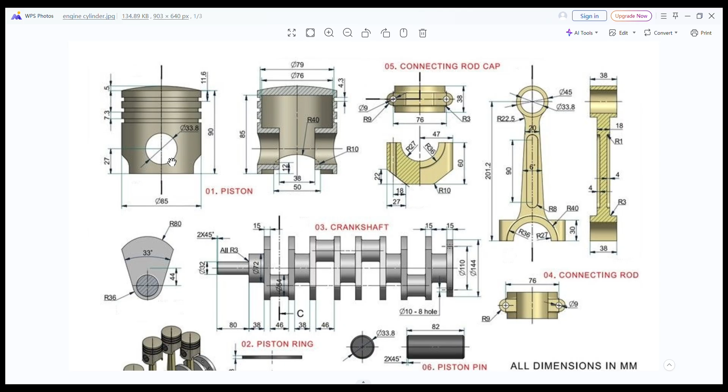Now first we create the front plane for sketch, then create the circle. Dimension is 85 millimeter, and then we can extrude it, and the length of extrusion is 90 millimeter. Enter. OK.

Now look here, now we insert the dome at the top of the piston. Going to insert features, and here is the dome. Apply at this surface, and dome is 5 millimeter length. OK. Now look here, the dome is ready.

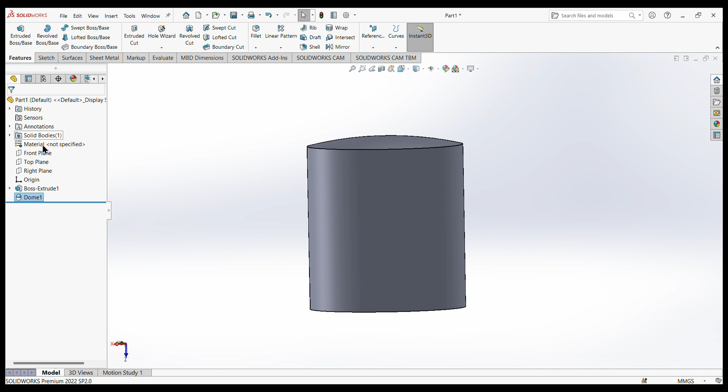Next one, we create the piston rings. First we select the plane for sketch, create the circle of 79 millimeter. If you look here in the diagram, the diameter of the piston ring is 79 millimeter. Now we are going to SolidWorks page, and then take the dimensions 79 millimeter. Enter here. Okay.

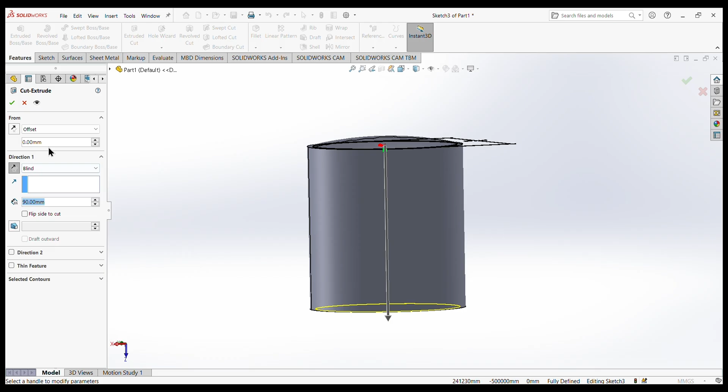Now we are going to create the piston ring. Okay students, so we can go to extrude cut command, select the extrude cut, and reverse direction, apply offset, and offset is 7.3. Enter. Okay, and then the length is 4.3. Enter here. Okay, and here is one thing, flip side to cut means it will extrude cut on the edges, not inside.

Now look here, your piston ring is created. Now you can create 3 more the same way, but if you want to create them quickly, simply assign a linear pattern. But before that you need an axis, so create a temporary axis. Now select this axis, and then apply the pattern, number of 3 patterns, and total length is 7.3 plus 4.3 is 11.6. Enter here. Okay, and select this surface. Okay, now look here.

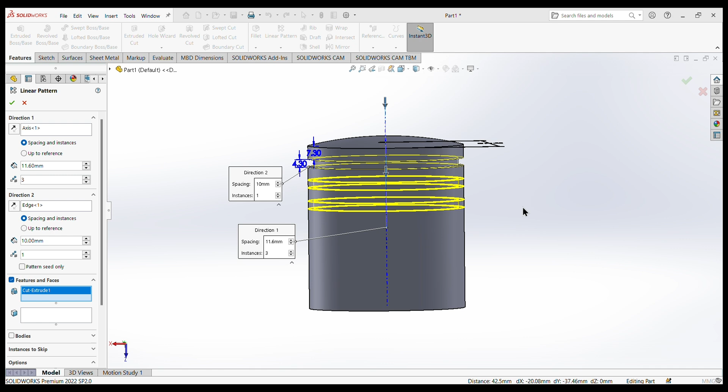Now look here, three piston rings have been created.

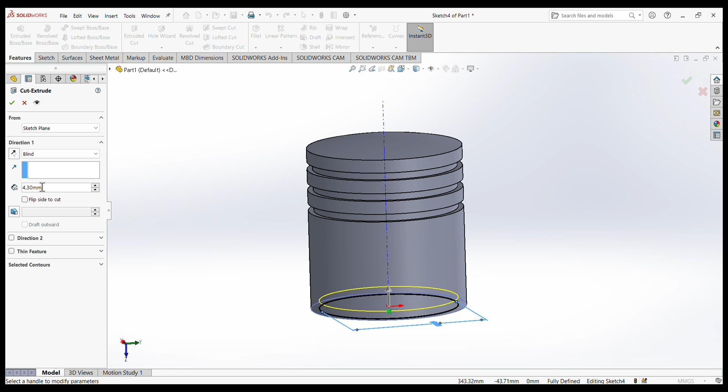Now we are going forward and create the circle on it. First we select plane for sketch. Okay, we create the circle at this point and then assign the dimension.

This one is 33.8, enter. And the distance from this point to this line is 27, enter here.

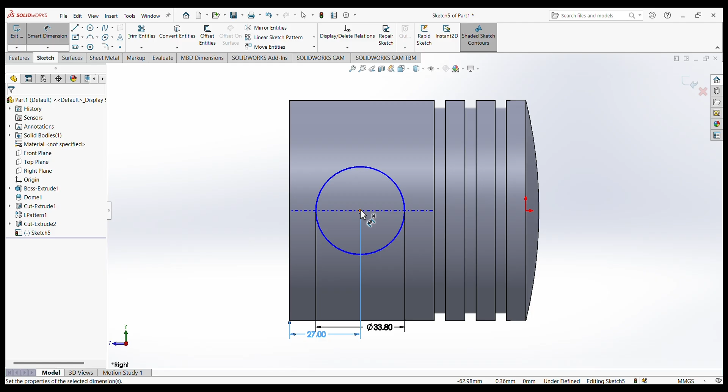Okay, now we make this one. Okay, this is on exact the same axis, this is fully defined.

Now we can make it extrude cut, use the extrude cut command, and then select here, through all both.

Now look here. Okay students, now one thing remains, that is we create a cut at this surface. First we select the top plane for sketch, and create a line.

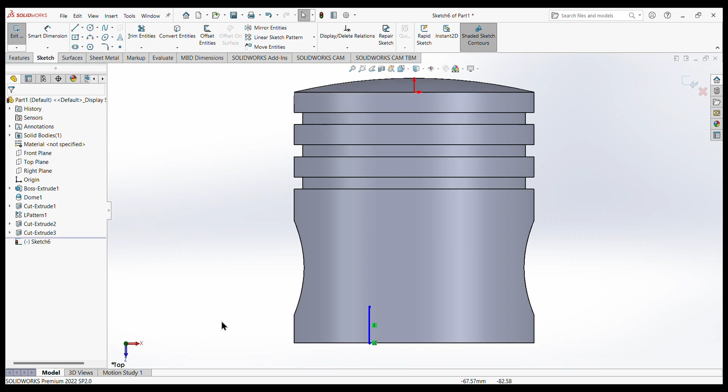Create a line at this point randomly. Okay, and then create a center line at the center.

Now we can assign the dimension. This one is 12 millimeter exact, enter.

And then we make it mirror, use mirror entities, select this one and mirror about this construction line.

Now we apply the dimension again, from this point to this one is 50, enter.

Now we use the 3-point arc, select this point, this one, and now we apply the dimension, the radius is 40.

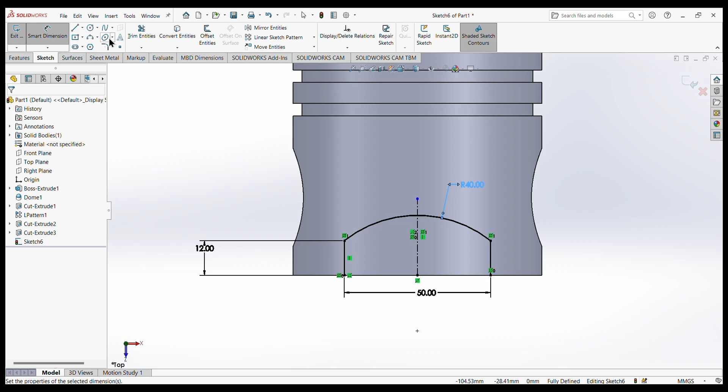Enter. Okay, now we can apply the fillet at this point, select this one, also this one, and the fillet radius, if you look here, is 10. Okay, this is 10 radius.

Okay, now look here, now the one thing remaining is this sketch, make it closed like this one. Okay, now we go to feature, select the extrude cut command and select this face.

Use through all both.

Okay, now look here. Okay students, now the piston is approximately ready. Now one thing remains.

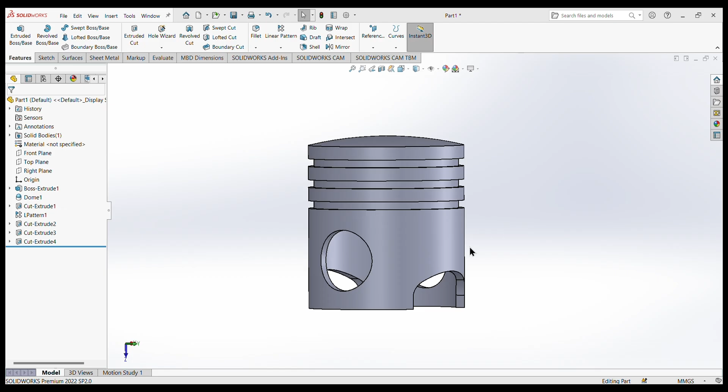We have to select right plane for sketch and make a circle at this point, and the diameter is 45.

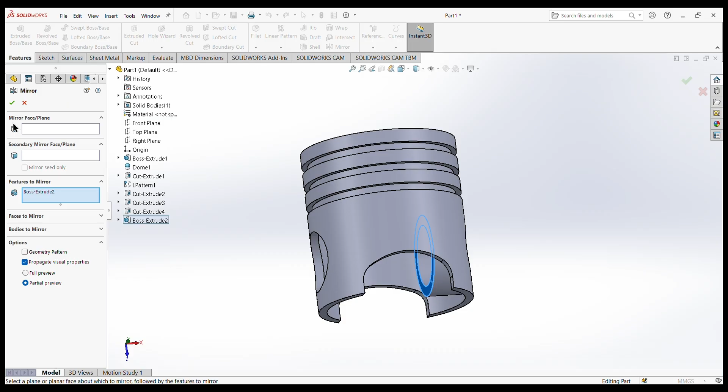Feature to mirror is this one. Okay, and mirror plane is front plane - okay, right plane, sorry. Okay, now look here, our piston is fully ready.

Okay students, so this is our piston that is created, and then we apply the color. Now we are going to detail color, appearances. Here is metal, polished steel. Okay, now look here, it is ready.

Now we can save it, save as, number 1 piston. Okay, save it.

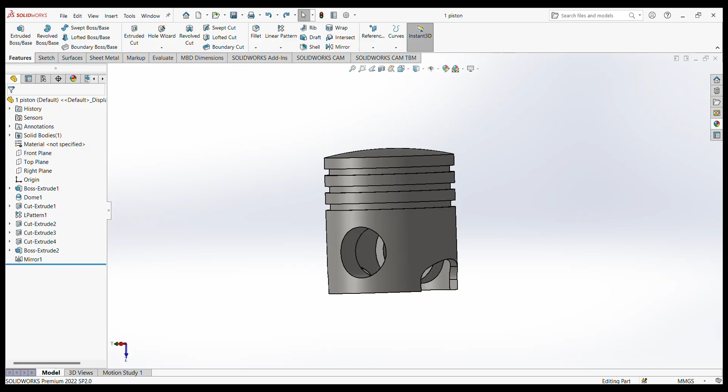Going to SolidWorks page, create new file, new part. Okay, select the front plane, ready for sketch, create the circles.

Make another circle, and then assign the dimension. This one is 79 millimeter, this one is 85 millimeter.

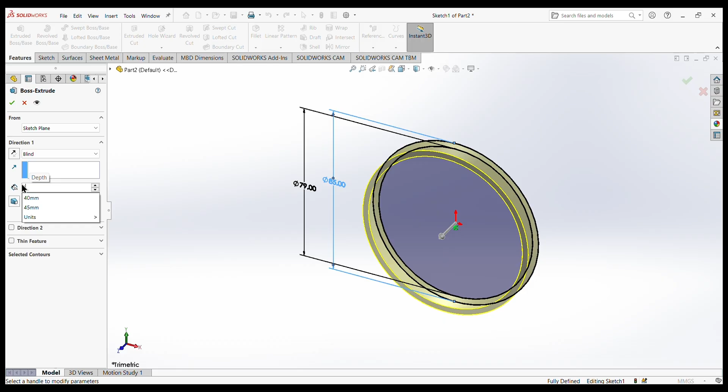Okay, and then apply the extrusion. Total is 4.3, enter. Okay.

Now look here. Okay students, now we apply the color, and here is rubber, this one. Okay, matte rubber.

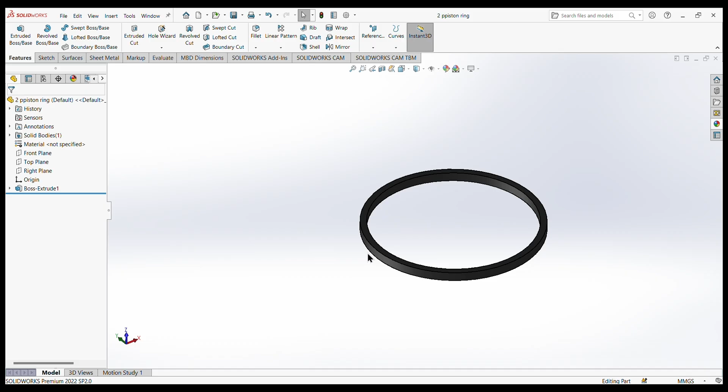So let's go to the SolidWorks page and create this part. Select new part. Select front plane for sketch.

First we create the center lines, vertical, infinite. And create again a center line, horizontal, infinite.

Now create a circle and assign the dimension, 36 millimeter is the radius. Now the diameter is 72. From this point to this one is 45 distance.

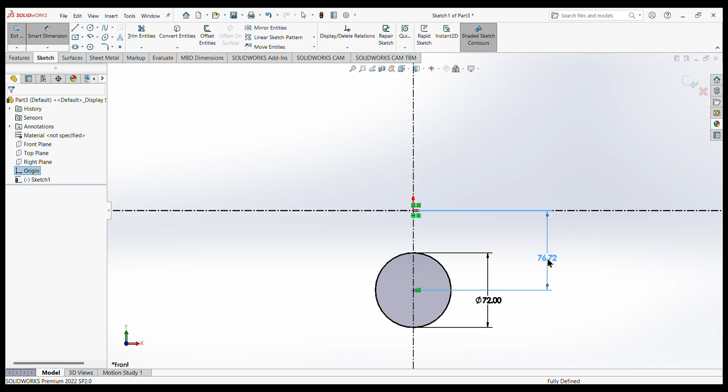Now we create a curve, 3-point curve. Now we assign the dimension. First we make it horizontal, both of these points. Select this one, press Ctrl, select the next, make it horizontal. Now we make a line randomly from this point to this one.

Now we make this line tangent to this circle. First select this circle, press Ctrl key and select this line. Now we create the same line, make it mirror about this one. Trim the extra line, this one and this one, and remove it also. Now we extend it a little bit, just like this one, and then assign the dimension.

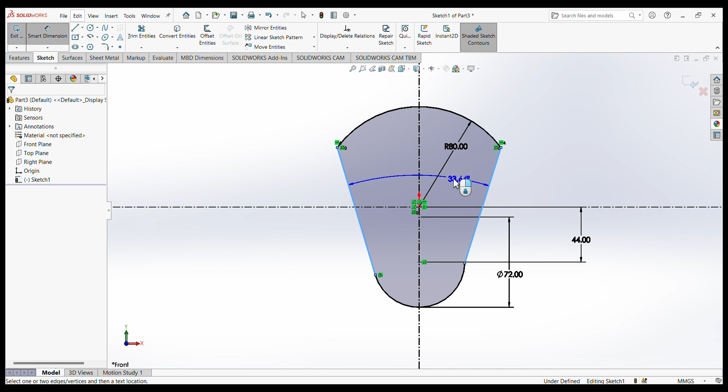This one is 80 radius, and the angle is 33. Now we can make it horizontal, both of these points. Select this one, press Ctrl key, select this one, horizontal. Now our full sketch is fully defined.

Now we can make it extrude. Going to feature extrude, and if you look here, the total extrusion is 15 millimeter.

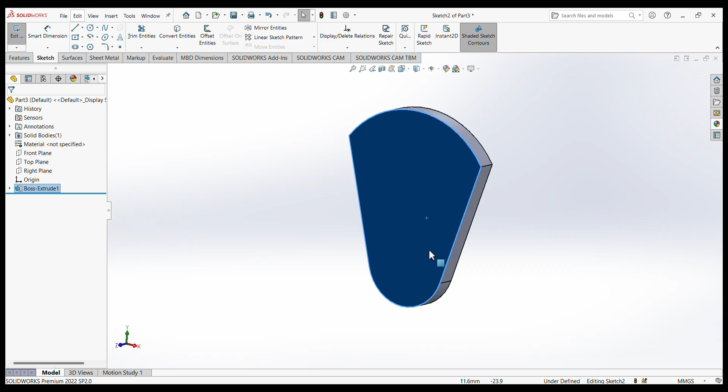Now look here, we select this one for sketch and create a circle at this point, assign the dimension, total diameter is 72. Make it extrude 38 millimeter length.

Now select the other face for sketch, create a circle at this point and assign the diameter, that is 52 millimeter. Now assign the extrude command, extrusion, and 46 is the length.

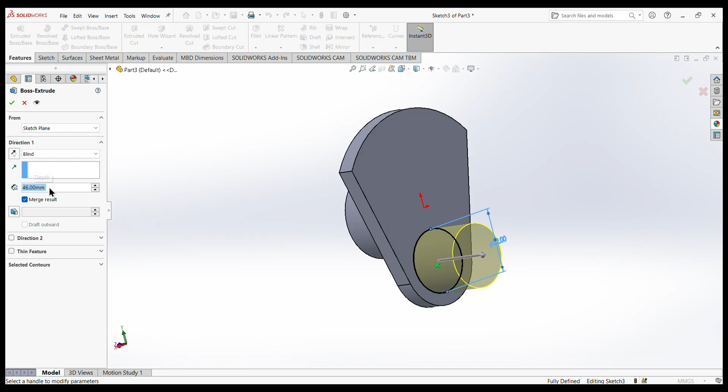OK student, look here. Now we are going to make it mirror. First we select the reference plane at the exact mid between these two surfaces. Now select the mirror command, and the feature mirrors this one and this one.

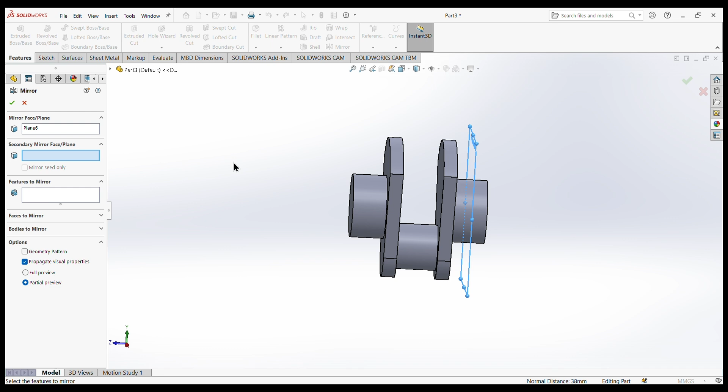Now look here, again select the reference plane between these two faces, and then make it mirror. Select the mirror command and select this plane 6. And here is face to mirror, bodies to mirror.

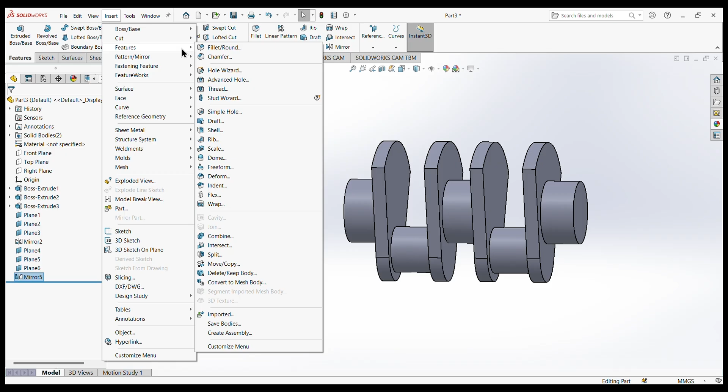Going to insert, here is feature and move copy. Now select this body and assign the degree 180, enter here. Now look here, it is completely rotated 180 degree.

Now again we select the reference plane between these two faces, and mirror, select bodies to mirror this one and this one.

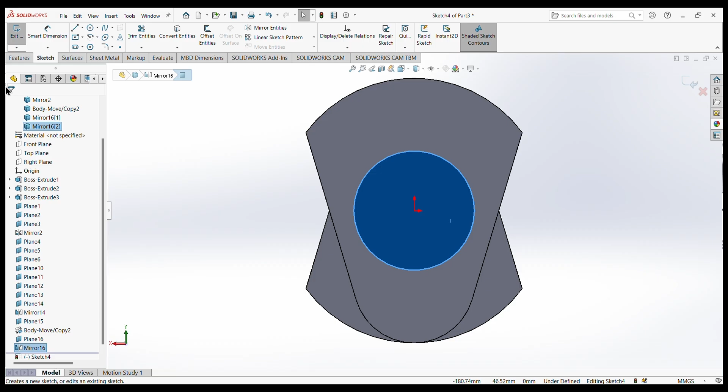Let's go to SolidWorks page. Make this face for sketch, select the circle, make two circles and then assign the dimensions. This is 144, enter. This one is 110.

Okay, now we create a hole of 10 millimeter, assign dimension, 10 millimeter dia. Okay, now we assign the circular pattern, circular sketch pattern, and then select this one at center point, this one, and 8 is the quantity. Okay, now look here.

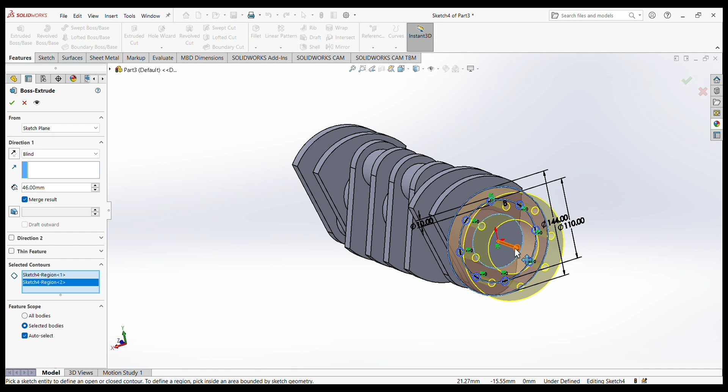Okay, now we are going to extrude command. Now select these surfaces, this one and also this one. Okay, and the total thickness, that is 15 millimeter. Okay, now look here, this end is completely ready.

Now we select this one for sketch, and if you look here, there is 32 millimeter dia and 80 millimeter length. Okay, select the circle command and create a circle, assign the dimension, that is 32, enter, and the extrusion is total 80 millimeter, enter.

Okay, now look here. The one thing is remaining, that is fillet at these ends. If you look here, all fillets at the edges is radius 3 fillet. Okay, and the chamfer end at this point 2 cross 45.

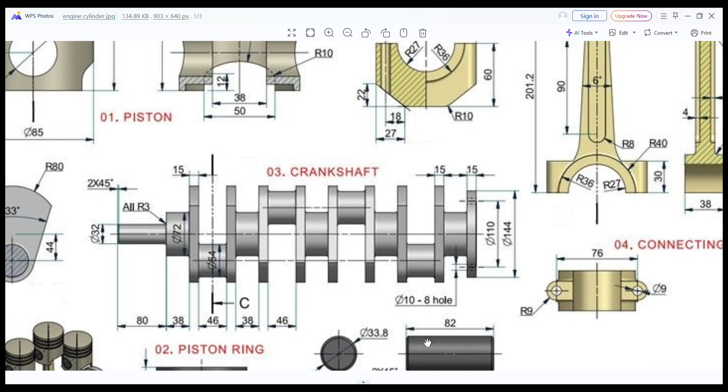Now select first, apply the chamfer at this edge, distance angle, 2 millimeter and 45 angle. Okay, now look here.

Now next we apply the fillet at all the edges. Before the fillet we make it combine. Going to insert, features, here is combine option. Now add, select this one, also this one, and also this one. Okay, add. Okay, now the whole body is combined together, means all is in one body.

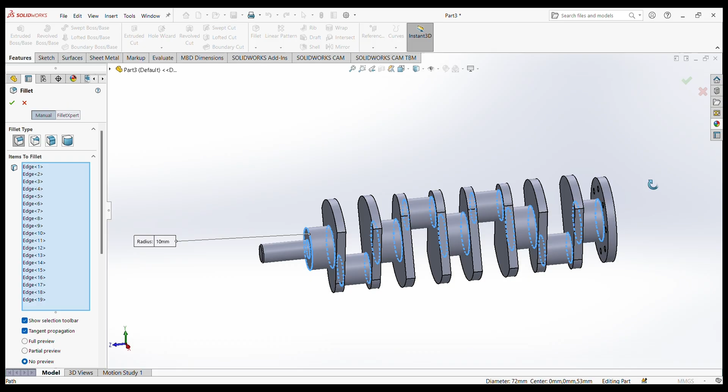Now we are going to fillet command and select the edges, and if we select this one, means select all the edges, no need to select one by one. Okay, now we apply the fillet on it, that is R3, means 3 radius, enter. Okay, now look here, the fillet is applied on all the edges.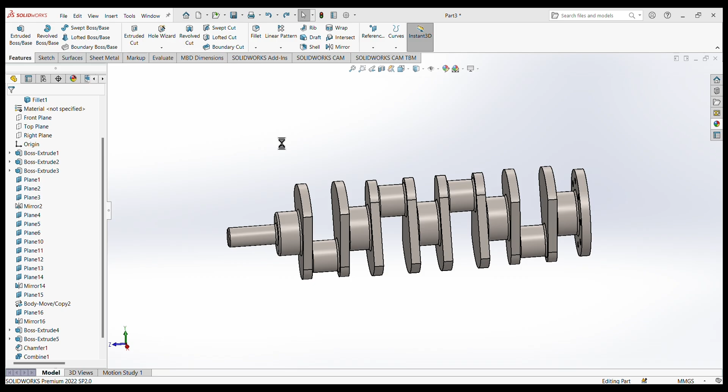Okay students, now we apply the color. Going to appearances, and here we apply the steel, select the brush steel. Okay, now look here, now we can save it, save as, part, that is crankshaft, enter. Okay, now we are going to the next part.

The next part, that is the connecting rod। अगर हम इसकी डायमेंशन देखें तो हमारे पास इसकी जो टोटल लेंथ है वो हमारे पास है 201.2, एंड इसके टू फेसेस हैं, एक टॉप है और एक बॉटम है। अगर हम टॉप वाले को देखें तो हमारे पास 45 मिलीमीटर डाया एंड 33.8 मिलीमीटर डाया है, और इसकी जो एक्सट्रूजन होगी वो हमारे पास 38 मिलीमीटर होगी।

और अगर हम इसके बॉटम एंड को देखें तो हमारे पास ये दो सर्कल क्रिएट हुए हैं, एक 36 रेडियस है और दूसरा 27 रेडियस है। इसको भी हमने एक्सट्रूड करना है और वो भी सेम 38 है।

एंड देयर इज़ द सेंटर पार्ट ऑफ द कनेक्टिंग रोड। अगर हम इसकी डायमेंशन देखें तो हमारे पास टू लाइंस हैं जो कि टेंजेंट हैं इन दोनों सर्कल के साथ, एंड देन इसके दरमियान जो एंगल है वो हमारे पास 6 डिग्री एंड 20 मिलीमीटर इसकी टोटल लेंथ है। और हमारे पास जो इसकी एक्सट्रूजन है वो हमारे पास 18 मिलीमीटर है। एंड देन हमारे पास एक स्लॉट क्रिएट होगी एट द मिड ऑफ दिस वन, और उसकी डायमेंशन है 90 मिलीमीटर एंड रेडियस इज 8।

सो पहले हम ये बेसिक स्ट्रक्चर क्रिएट करते हैं एंड देन हम इसके ऊपर जो अप्लाई होंगे फिलेट्स वगैरह वो अप्लाई कर देंगे। क्रिएट न्यू फाइल, select part. Now select front plane, ready for sketch. First we create a center line, vertical, infinite length.

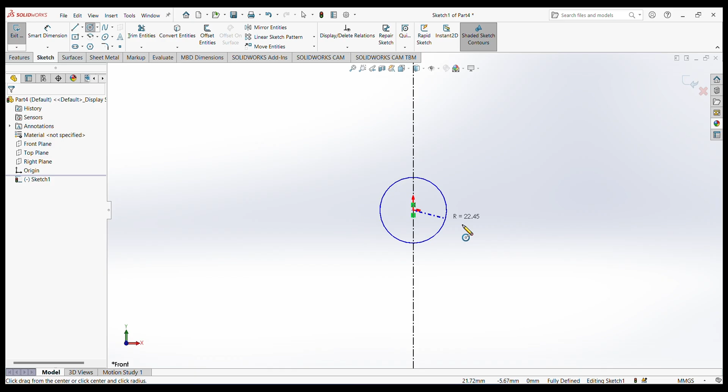Then create the circles. Here is two circles, that is 33.8, enter. This one is 45, enter.

Okay, now we create two more circles at this point and then apply the dimension. This one is R27 and the diameter is 54, and then apply the dimension. This one is radius is 27, diameter is 54, enter. And this one is radius is 36 and diameter is 72, enter.

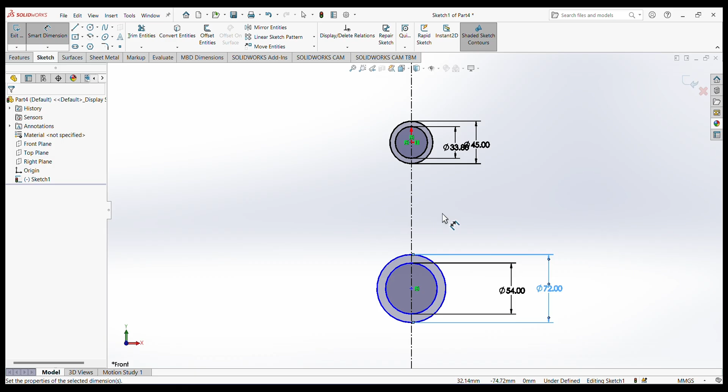Okay, and now the length between them, that is 201.2, enter.

Okay, now we create a line randomly at this point to connect this circle. First we select a line randomly at this point to connect this circle, and then we make it coincident. Select this one, press Control key, select this circle and release the key. Here is coincident.

Okay students, now we create this mirror. Mirror entity, select this one, about mirror, select this one.

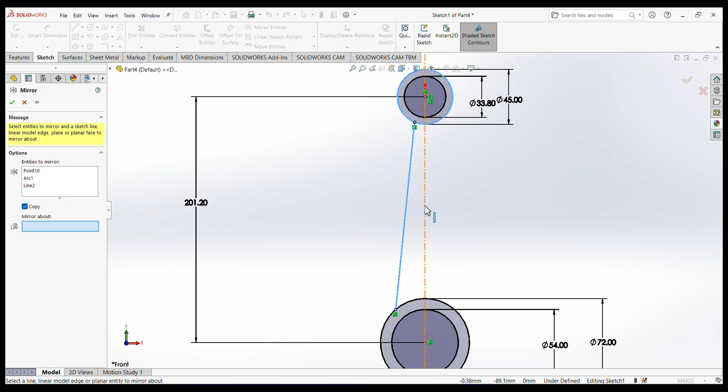Okay students, now the next one, that is we make it half. Select a line from this one to this one. Now use the trim entities. Remove this one, also this one.

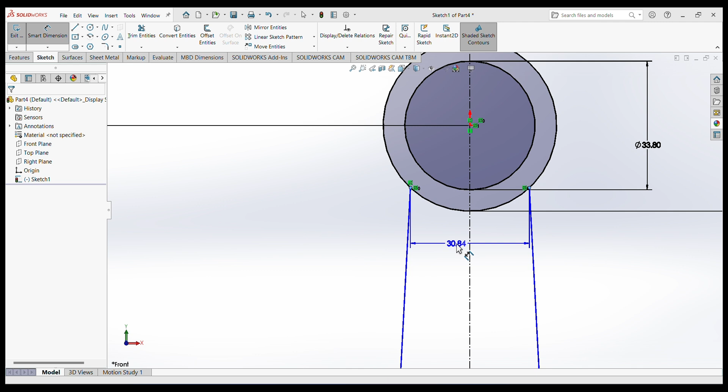Okay, now we apply some more dimensions, just like select the dimension and angle is 6, enter. And this one is from this point to this one, the length is 20.

Now the sketch is fully defined. Now we are going to extrude boss command. Select the extrude boss command and select carefully this one, this surface area. Also select this one and this one. Now use mid plane and the total length is 38. Enter here. Now look at that.

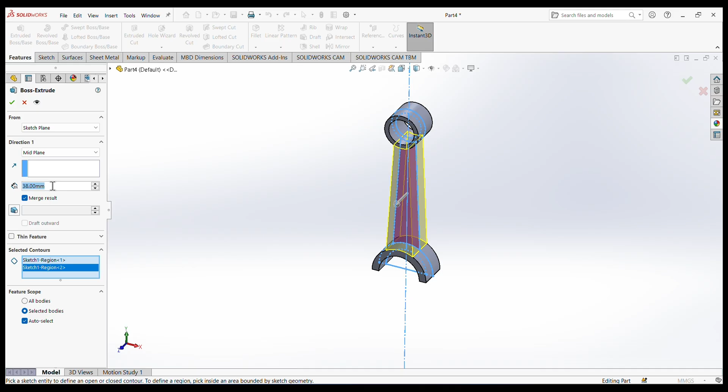Now the next one, we select also sketch and going to extrude boss command. Select this one and this one. Again use mid plane and the length of extrusion is 18. Enter.

Now look here. Okay students, the basic part of the connecting rod is ready. Now we are going further and create a slot on it. Select for sketch and create a center slot.

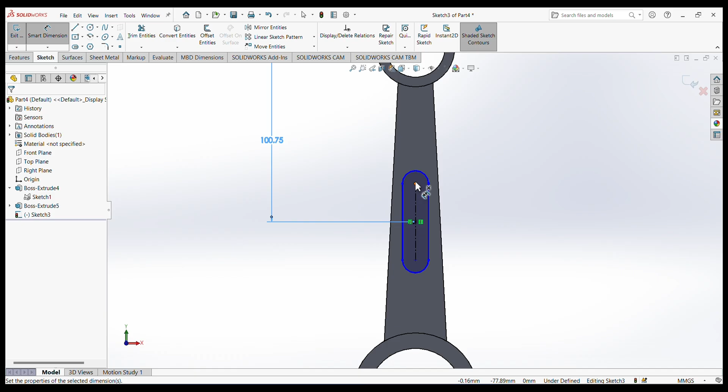Now the slot is fully defined. And now the one thing is that we can make it extrude cut. And how many extrude cut? That is 4 millimeter extrude cut on both sides.

Now select the extrude cut command. Extrude cut, it is selected. There is not mid plane, blind. And the length is 4. Enter.

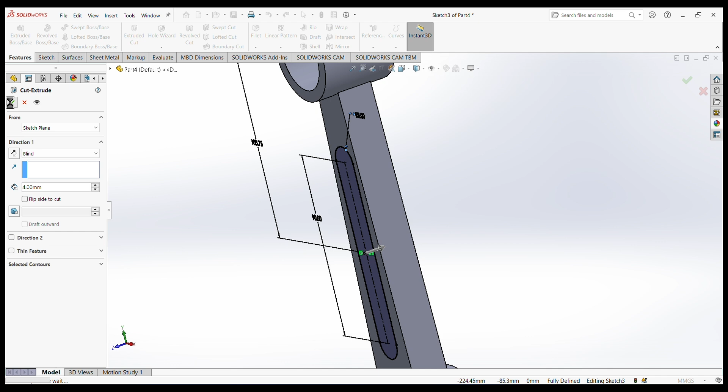Now look here, now we can make it mirror. Select the mirror command and select the plane, front plane, and then feature to mirror, extrude cut. Now look here, the slot has been mirrored.

Here we apply the fillet. Select the fillet command. Select the edge option. Select carefully this edge and this edge. Now apply the fillet, 1 millimeter radius. Now look here, okay students.

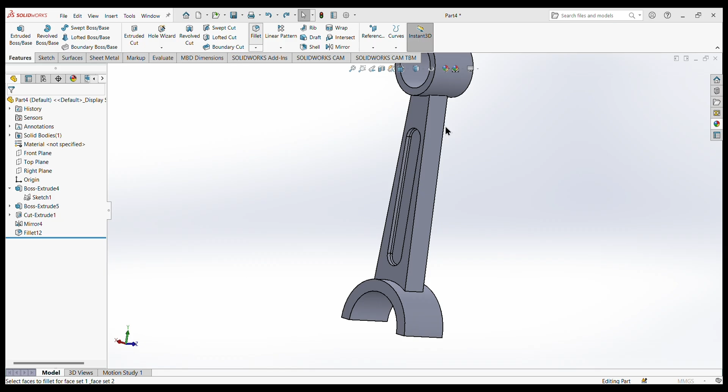Now we are going forward and apply fillet at this edge. Select the fillet command. Select the first option, edge. Select this edge and this edge. Apply the fillet, and that is 40. Enter. Now look here.

Same, we apply the fillet at this one. Select fillet and select edge at this end and this one, and apply the fillet, that is 22.5. Enter. Now look here. Okay students, the fillet has been applied.

Now the one thing is remaining. Select the plane, top plane for sketch. Here create a slot. Select the slot, straight slot.

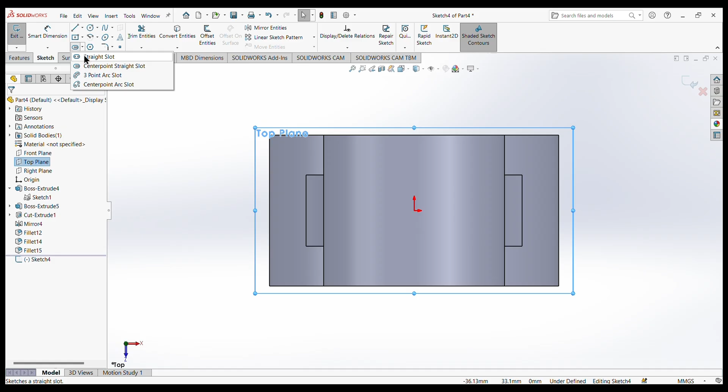Now apply the dimension, that is 76 millimeter. Enter. Now make it in exact origin, make it 0. Enter. Now it is in exact center. Now the radius of this slot is 9.

Now we create a circle at this end and at this end of the slot. Assign the dimension, diameter is 9. Diameter is 9. Enter.

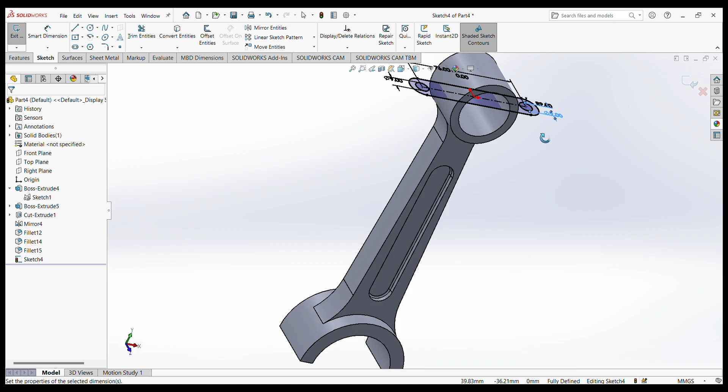Now going to extrude boss command. Here we apply the offset, and that is 201.2 minus 30, and that is 171.2. Enter. And select through all and reverse direction.

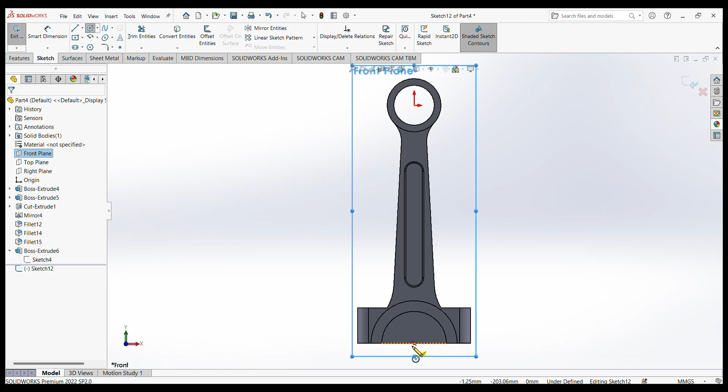Now look here, okay students, now the one thing is going to simply remove this face. Select the front plane for sketch and then create a circle. Assign dimension, that is 54. Enter here.

Now going to feature, select the extrude cut command. Select here, through all both.

Now look here. And there is one more thing, that is, if you look here inside the circle, there is some restriction between the holes. So we create the hole. First we select this one for sketch and then create hole. Here, select. Going to feature, extrude cut command.

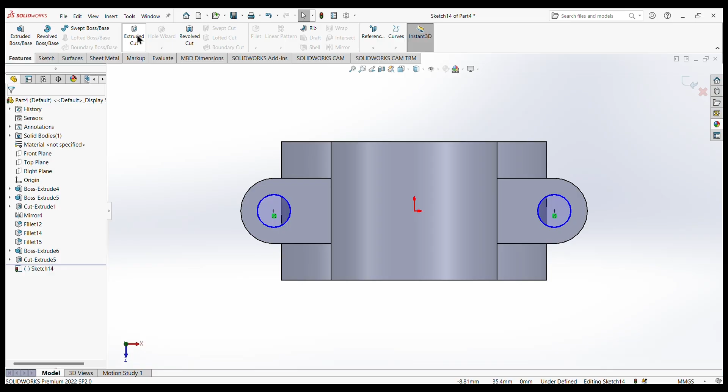Now look here. Now look at that. Here the one thing is remaining, that is applying fillet at this edge. Select the fillet command, select this edge and this edge. Applying the fillet, 3 radius.

Now look here. Okay, now we are going to apply the color gold.

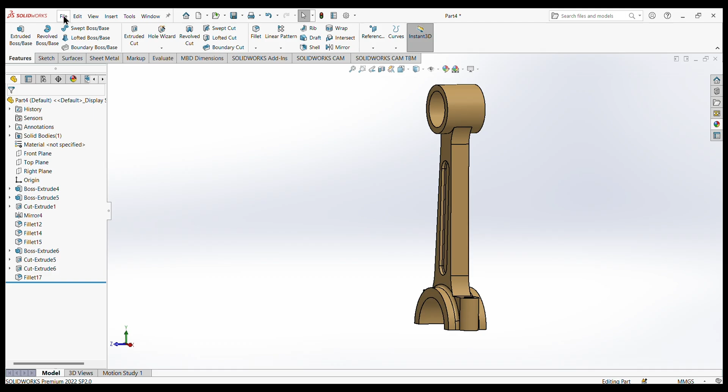Now we are going to the next part. The next part, that is connecting rod cap.

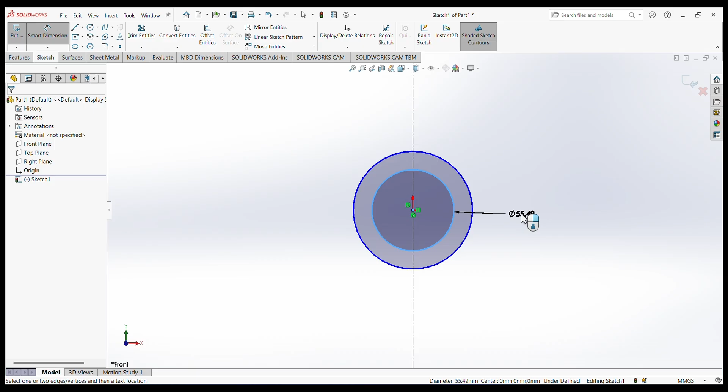This one is 54 millimeter dia, this one is 72 millimeter dia.

Here we create a line from this point to this one randomly, this one just like this one, and this one. Now we assign the dimension.

From this point to this one is 60, enter. Now from this point to this one is 47, same this one to this one is 47.

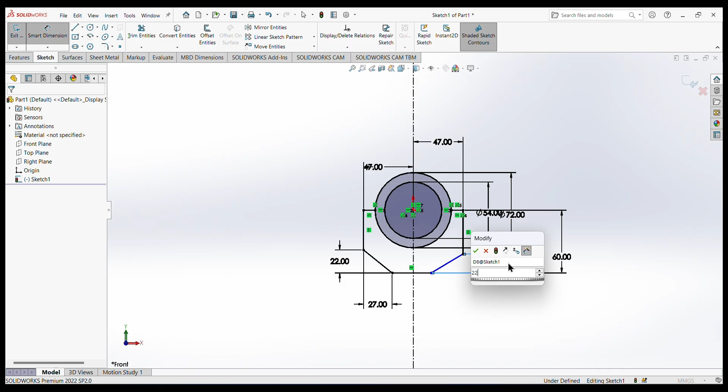And from this one to this point is 22, enter. And from this point to this point is 27, enter here. Same, from this point to this one is 22. And from this point to this point is 27, enter.

Now the sketch is fully defined. Then we apply the extrusion, going to feature extrude boss command. Before extrusion, one thing is remaining.

That is we make cut just like this one. Select and remove this half of the sketch.

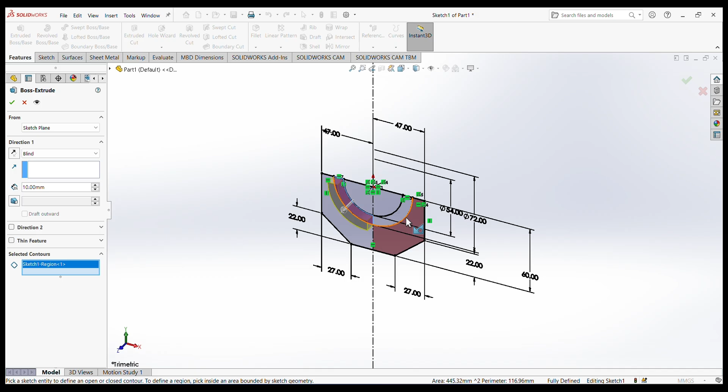Now we are going to feature, going to extrude boss command and select this one, mid plane, and the total extrusion, that is 38, enter here.

Now we are going forward. Select this sketch, again extrude boss, select this one and this one, mid plane again, and the length is 18, enter.

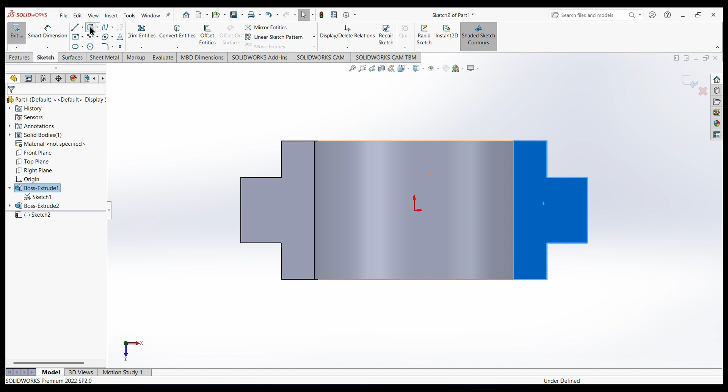Now look here. Now we are going forward and create the holes at this point. Now select for sketch, select the circle just like this one.

Now assign the dimension. This one is 9 millimeter dia, this one is 9, enter. And the distance between these circles are 76, enter.

And make it in exact center, means from this point to this one is half of 76, and that is 38, enter here. Now it is in exact center.

Now we can use the extrude cut command. Select the blind and through all.

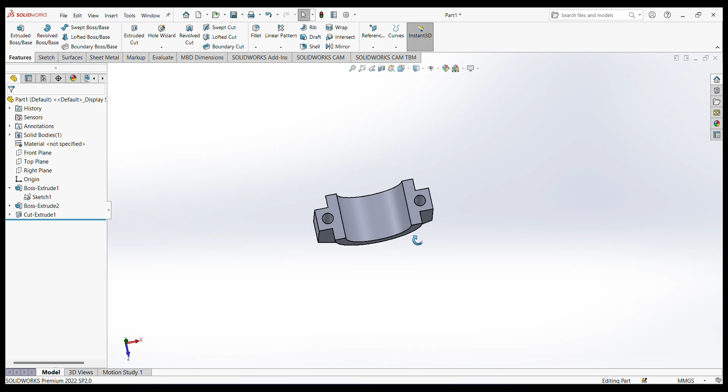Now look here. Now one thing is remaining, that is first we make it sketch. Create the circle again, and here is also again, and assign the dimension, that is 18 millimeter dia. This one is also 18 millimeter dia.

Now we can use extrude cut command and selected contours. Select this face. First we remove it. Now we make it close and then we can extrude cut.

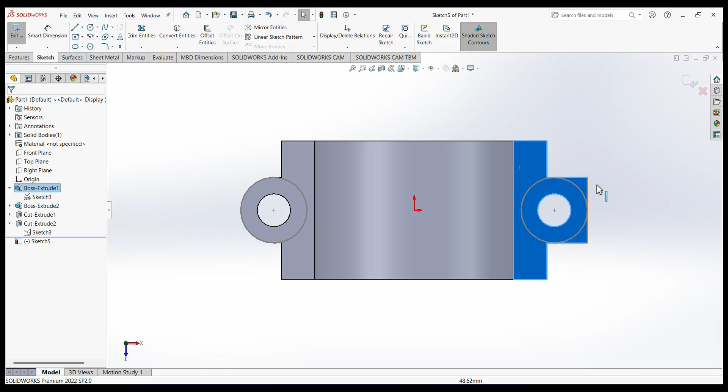First select the sketch and create a line at this point to this one and this one.

Again a circle and then assign the dimension, that is 18 millimeter dia. Enter here. Going to sketch, feature, extrude cut command.

Select this face and this face.

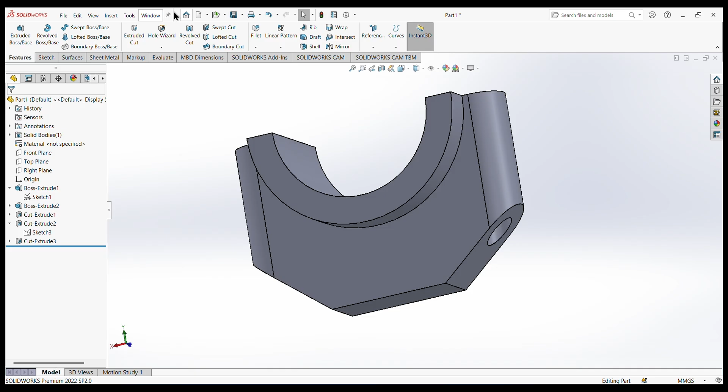Apply fillet, select this edge carefully and also this one. Apply fillet 3 millimeter, enter here. Now look here. The connecting rod cap is fully ready.

Now simply we are going to assign the color. Appearances gold, similar as we assign the connecting rod.

Now look here, we are going to save it. Save as 5 rod cap, enter here. Now we are going to the next part and that is

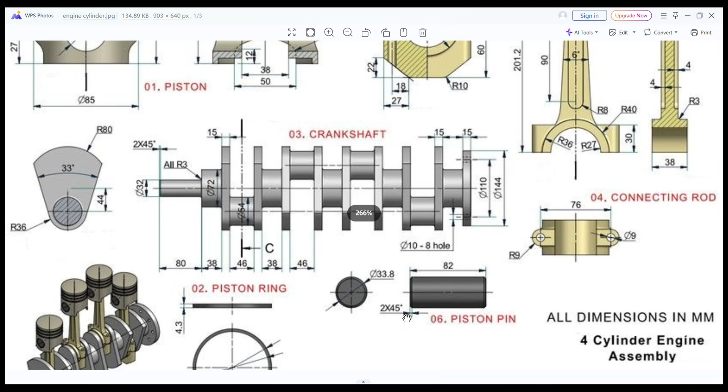Piston pin. Here is 82 millimeter length, 33.8 millimeter dia and at the edges 2 cross 45 chamfer. Select new file.

Select front plane for sketch, create a circle, assign the dimension 33.8, enter here. Feature extrude boss 82, enter here.

Okay, select the chamfer, select both edges and apply the chamfer, that is 2 and 45 millimeter, sorry 45 is the angle. Okay, now look here. Okay students, all the part has been ready.

Now we assign the color chrome. Now look here. Okay, we can save it. Save as 6 pin, enter here. All the parts has been created.

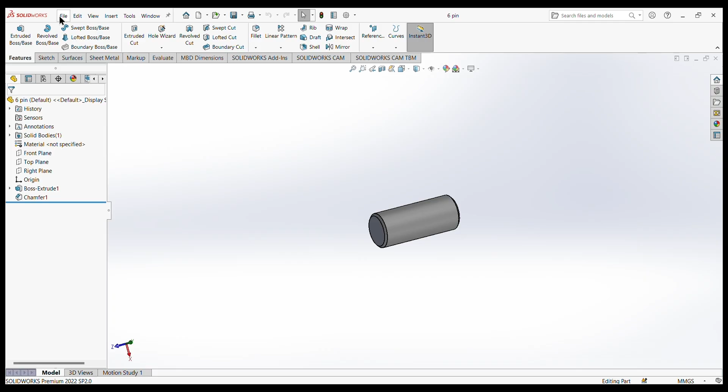अब हम चलते हैं असेंबली में और वन बाय वन हम पार्ट्स को असेंबल करते हैं। असेंबली, ओके।

नाउ स्टूडेंट्स, अब हम वन बाय वन पार्ट को इंसर्ट करते हैं। फर्स्ट वन पिस्टन, सेकंड वन पिस्टन रिंग, थर्ड वन क्रैंक शाफ्ट, फोर्थ वन कनेक्टिंग रॉड, फिफ्थ वन रॉड कैप, और सिक्स्थ वन पिन। तो सबसे पहले हम क्रैंक शाफ्ट को प्लेस करेंगे क्योंकि क्रैंक शाफ्ट के ऊपर ही पिस्टन और कनेक्टिंग रॉड ने प्लेस होना है। तो पहले जो होगी वो क्रैंक शाफ्ट की प्लेसमेंट होगी।

ओपन। नाउ लुक हियर। अच्छा स्टूडेंट्स, अब जो मेन चीज़ है कि हमने इस क्रैंक शाफ्ट को एडजस्ट कैसे करना है, तो वो आपने देखना है। सबसे पहले हम इस पे राइट क्लिक करेंगे।

इसको फ्लोट करेंगे, मीन ये मूवेबल हो। सेकंड वन, अब हमारा जो पिस्टन है उसने इस क्रैंक शाफ्ट के ऊपर प्लेस होना है और देन क्रैंक शाफ्ट ने मूव करना है। अब इसने मूव किस तरह करना है, ज़ाहिर सी बात है इसको कोई पाथ गिवन हो, कोई इसका फ्रेम हो जिसके ऊपर इसने रोटेट करना है। तो फर्स्ट हम एक फ्रेम इसका क्रिएट करेंगे जिसको हम इसके ऊपर प्लेस करेंगे और देन ये मूवेबल होगा।

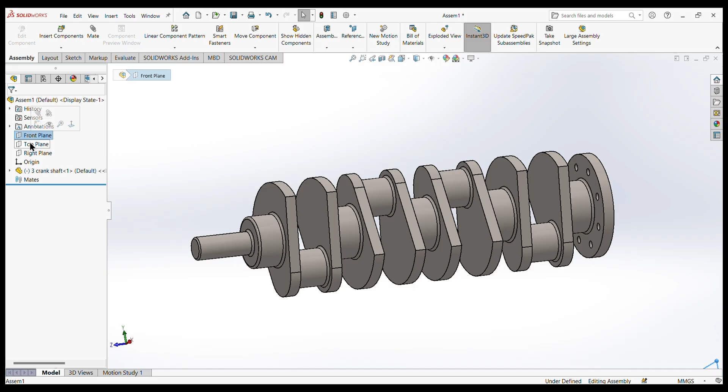तो अभी आप देखें, हम एक इसका फ्रेम स्केच करते हैं। फ्रंट प्लेन, राइट प्लेन फॉर स्केच। Okay, now we create a frame of crankshaft. Okay, create a line.

जितने पिस्टन कनेक्टिंग रॉड हैं उतनी ही हमारे पास ये लाइनें भी क्रिएट होंगी। आप यूँ समझ लें कि ये एक किस्म की पिस्टन कनेक्टिंग रॉड ही है, बस हमने इसको कनेक्टिंग रॉड के साथ कॉन्सेंट्रिक करना है। नाउ वी असाइन द डायमेंशन।

दिस वन इज 156। Okay, this one to this one is 114. ये आप देख सकते हैं इनकी डायमेंशंस उधर ओरिजिनल जो डायग्राम है उस पर मौजूद है, आप कैलकुलेट करके देख सकते हैं।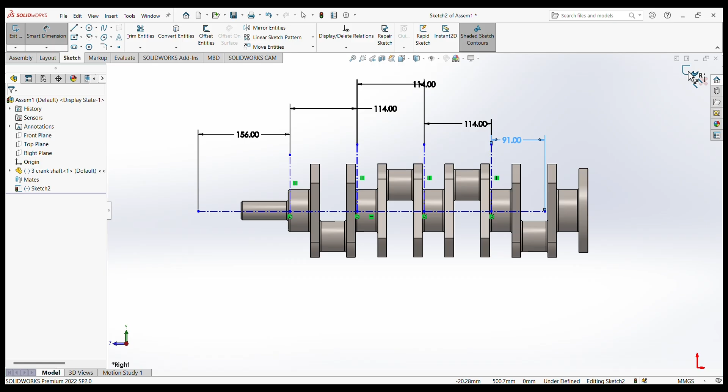ओके, नाउ ये हमारे पास 91 है, इंटर। ओके, नाउ हमारे पास ये फ्रेम क्रिएट हो गया। अब जस्ट हमने अपने इस क्रैंक शाफ्ट को इसके ऊपर कॉन्सेंट्रिक करना है।

यूज़ मेट कमांड, सेलेक्ट द कॉन्सेंट्रिक कमांड एंड मेक कॉन्सेंट्रिक दिस लाइन विद दिस वन। Okay, now look here, ये इसके कॉन्सेंट्रिक हो गया। अब एक और कमांड यूज़ करते हैं, कोइंसिडेंट, मेक दिस पॉइंट

कोइंसिडेंट विद दिस फेस। Okay, now look here। अब मैं आपको बताता हूँ कि इस फ्रेम को, इस पाथ को बनाने का फ़ायदा क्या था। अभी आप देखें, ये फ्रीली रोटेट कर रहा है इस फ्रेम के ऊपर। ओके स्टूडेंट्स, तो ये मकसद था इसको बनाने के लिए।

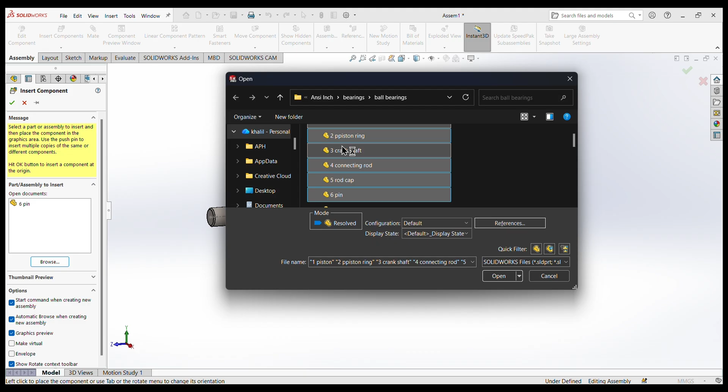नाउ अब मैं इंसर्ट करता हूँ नेक्स्ट कंपोनेंट्स वन बाय वन। ये सारे इकट्ठे ही कर लेता हूँ और देन उसको असेंबल कर देंगे। 6 पार्ट, लेकिन एक क्रैंक शाफ्ट को छोड़ के। प्रेस कंट्रोल की एंड सेलेक्ट क्रैंक शाफ्ट। ओके, without crankshaft, all parts selected.

Press tab, enter here, again press tab, enter here. Enter here means just click. Okay, okay, and this one pin.

Okay, now अब हम इनको असेंबल करते हैं। फर्स्ट वन, open mate and select concentric command, make ring concentric with piston.

Okay, and then make coincident this face with this face. Okay, if you look here.

ओके स्टूडेंट्स, नाउ अब आप बार बार पिस्टन रिंग्स को इंसर्ट करके और यही प्रोसीजर करके आप कर सकते हैं, लेकिन अगर आप अपना टाइम बचाना चाहते हैं तो उसके लिए एक टेक्निक है।

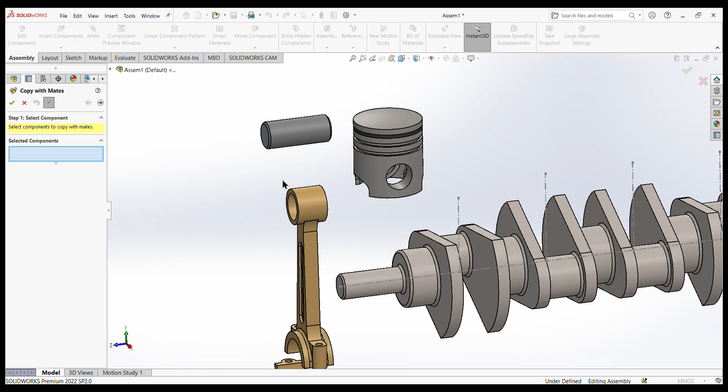आप जाएं इंसर्ट कंपोनेंट को स्क्रॉल डाउन करें, हेयर कॉपी विद मेट्स। अब आप उसको सेलेक्ट कर लें जिसको आपने कॉपी करना है विद मेट के साथ एंड हेयर क्लिक। नाउ अब आपने कॉन्सेंट्रिक करना है उसको किसके साथ कॉन्सेंट्रिक होना चाहिए, इसके साथ। और किसके साथ कोइंसिडेंट होना चाहिए, ये आपके पास रिपीट हो रही है इसके साथ।

ओके, लुक हियर। अब दोबारा वही प्रोसीजर करना है, पहले इसको ओके करके दोबारा वही किसके साथ कॉन्सेंट्रिक करना है, इसके साथ। और कोइंसिडेंट किसके साथ करना है आपको, इस फेस के साथ।

ओके, इसको आप क्रॉस कर दें। नाउ लुक हियर। ओके स्टूडेंट्स, नाउ वी आर गोइंग फॉरवर्ड। सेलेक्ट मेट कमांड एंड सेलेक्ट द कॉन्सेंट्रिक। सेलेक्ट दिस वन विद दिस वन।

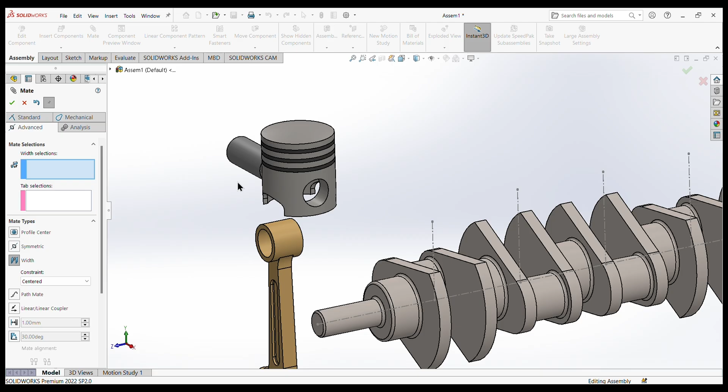Now going forward, go to advanced, select the width command, select pin both faces, also this face, and make center of this piston.

Now the pin came exactly to center. Now again use concentric command, select this one with this one, again select concentric, make this one with this one. Now going to advanced, select width command.

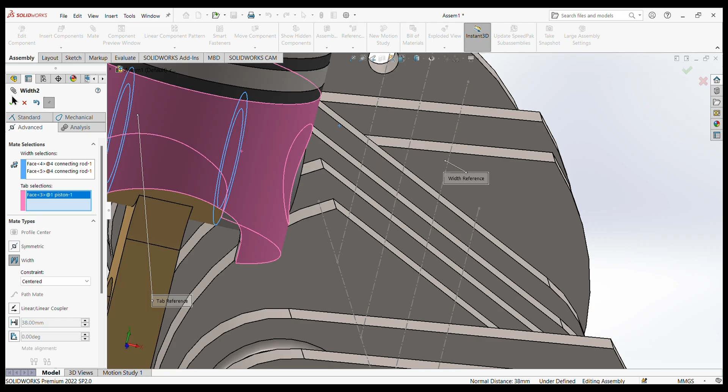Now look here, we use again concentric command, select this circle concentric with this one. Again use concentric, make this circle concentric with this circle.

Now move down and use coincident command, select this face coincident with this face. Now look here, your full piston with connecting rod is ready.

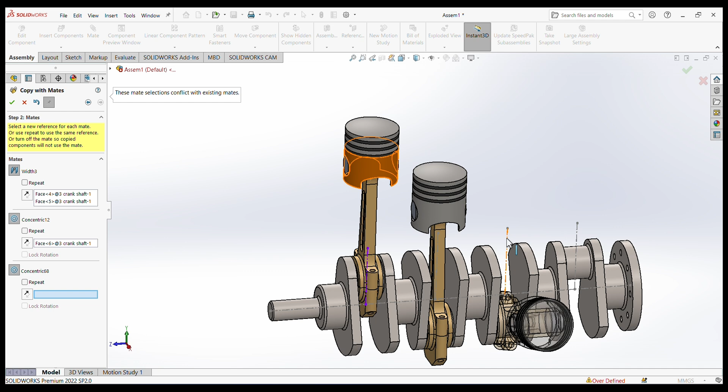Now again where do we place it, select width this face and this one, again concentric with this one and concentric with this one. Okay, now select this one.

Now again use width command, then again concentric, and then again concentric with this one.

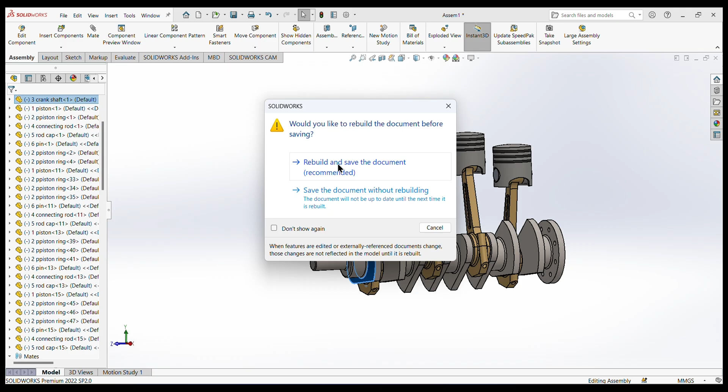Now we can save it. Rebuild and save. Save as 4 cylinder engine. Enter. Okay.

Now it is saved. After saving the assembly, we are going to the motion study of the 4 cylinder engine. If we look at its study, we go to motion study, then basic motion, and here we adjust frames per second first, and we want to make it 50. Enter here, or 60, 60 is better.

Okay, now we adjust the motor, and that is 60 rpm, and first we select the part in which the motor is adjusted, select this one.

And then here we first calculate it. It takes a little bit of time to unzip, and then it is able to freely move. Now, now look here.

Okay students, so this is the motion study of the 4 cylinder engine. If we want playback mode, now look here. So now students, this is the 4 cylinder engine assembly, and the motion study is now completed.